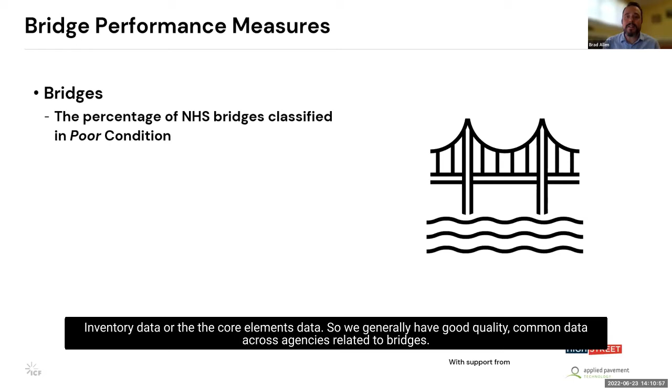So with bridges, there are lots of state performance measures agencies may look at. Most bridge performance measures are established based on the National Bridge Inventory data or the core elements data, so we generally have good quality, common data across agencies related to bridges.

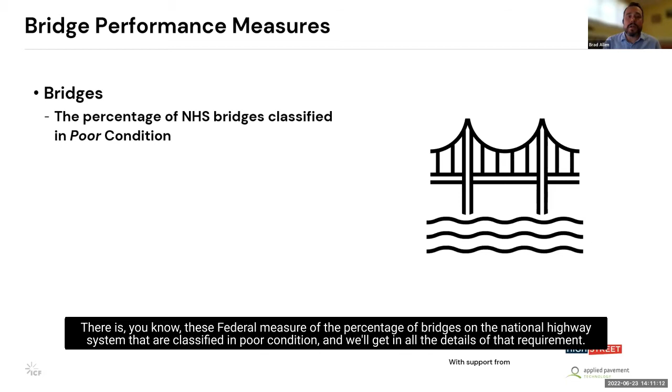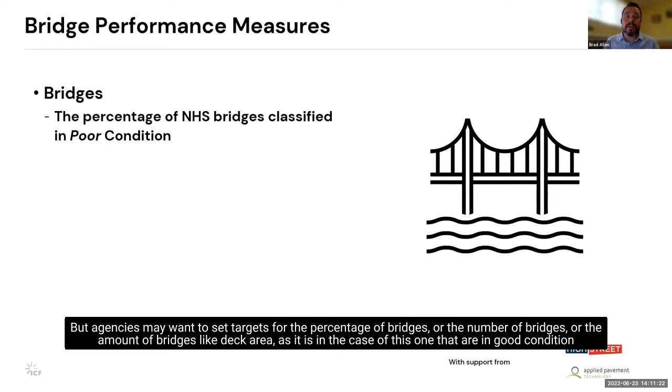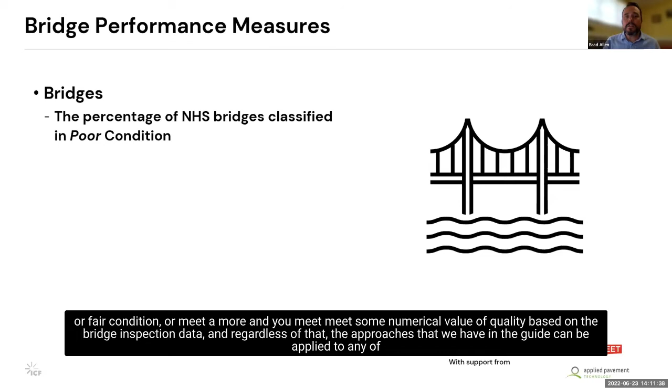There is the federal measure of the percentage of bridges on the national highway system classified in poor condition. We won't get into all the details of that requirement, but agencies may want to set targets for the percentage, number, or amount of bridges by deck area that are in good condition, fair condition, or meet some numerical value of quality based on bridge inspection data. Regardless, the approaches in the guide can be applied to any of those types of targets.

So what specifically do we present in the guide for target setting methods for bridge conditions? We have five methods presented for infrastructure conditions, along with specific details related to application to bridge performance targets as well as pavements. A little plug for next week's webinar, which will be on pavement target setting, one week from today. The way they're arranged on screen is from the more technically simplistic approach to a technically robust approach.

And it's not to say that any one of these approaches is better or could be more effective for your agency. It's just a nice way to organize and describe them, from a fairly simple approach to a more complicated approach.

So targeted change is that policy-based approach we talked about, where you simply look at your current conditions, maybe your historic conditions, and establish where we want to be at a given point in the future. Or in the case of the federal measure on percent poor, it might be a floor—you just say as an agency, we will do what we need to do to make sure we don't drop below a given condition.

Numerically, above a percent poor bridges, a time-based trend takes it further to look at how our bridges have been performing in the past. Can we establish a performance curve from that and extrapolate it into the future? We're using historic performance as a predictor for the future, and then using that prediction to inform our target setting process.

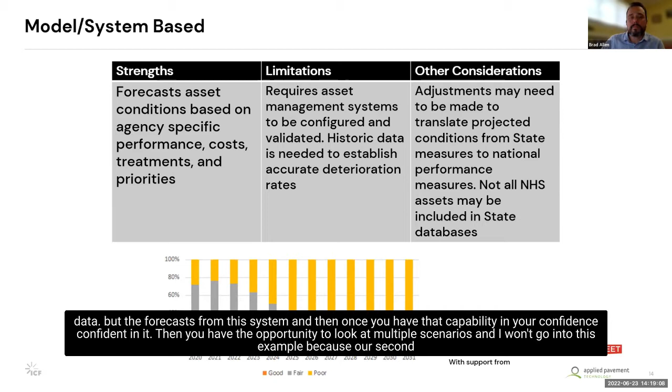Once you have that capability and you're confident in it, you have the opportunity to look at multiple scenarios. I won't go into this example because our second speaker today will be getting into this exact example from Connecticut DOT. But the opportunity to look at different funding scenarios or different strategic scenarios and understand what that might mean for your future performance, considering all of that in your target setting process.

With each of these methods I've gone through, there are some common challenges across all of them, particularly related to bridge target setting. Some of these pertain to the national measures themselves, the data behind the national measures, and others are due to the way bridges deteriorate and the way we manage and address that deterioration.

One of the issues—and I'm sure our speakers will get into it as well—is that the federal targets are on a 2 to 4 year time frame. We recognize this can be a challenge for a couple of reasons. First, bridges deteriorate slowly, so 4 years is maybe 5% of a new bridge's expected service life. Across your population of bridges, there just isn't necessarily that much natural change in condition in a 4 year time span, which leads to a challenge in setting those types of near-term targets.

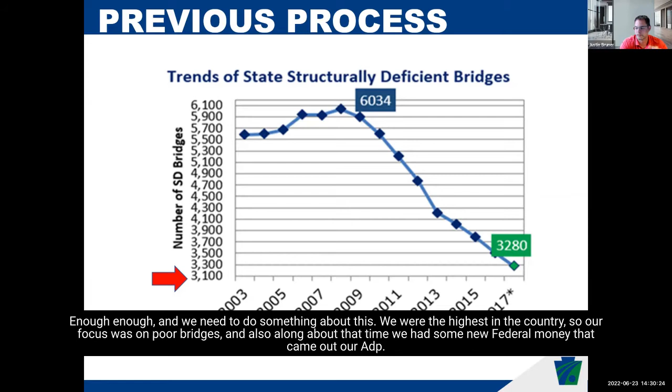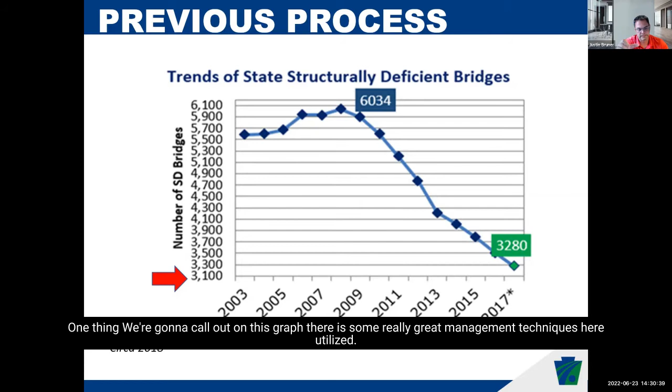One thing I want to call out on this graph, there's some really great management techniques utilized here. We call this the USA Today friendly version. If you cut your y-axis off a little bit, it does make you look like you've achieved slightly more than you have, even though you haven't. This is the version that comes out of our shop, and this is from a later time, but it's completely allowable to take off that y-axis and it looks like you've come down a whole lot further. Just food for thought.

So this is actually a really great methodology to utilize if you have excess money, or there's money set aside for these types of goals. But it's probably not the best type of performance target to utilize when you don't have enough cash, because really then people start to try to figure out how to, for lack of better terms, game the system so that you can try to meet these while still meeting other goals and targets that they're held to.

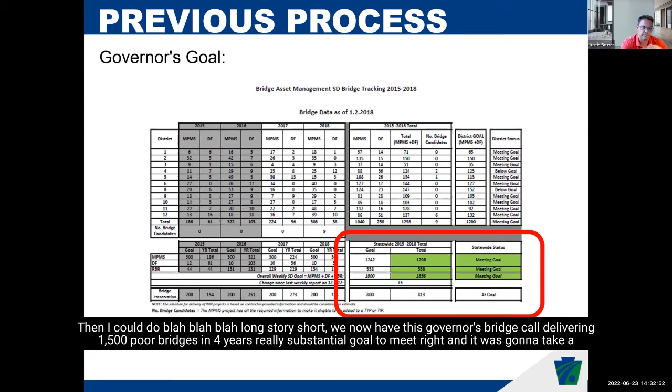And really what happened next was that in 2015, we came up with this concept of the governor's goal. The administration worked with the governor's office to come up with something good PennDOT could do. Long story short, we now have this governor's bridge goal of delivering 1,500 poor bridges in 4 years. That's a really substantial goal to meet, and it was going to take a lot of effort on our behalf. There was a lot of internal collaboration and effort to really make this happen, because it was really a stretch for us to achieve this.

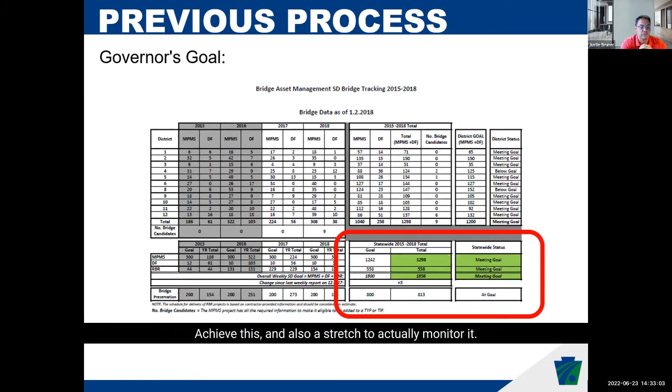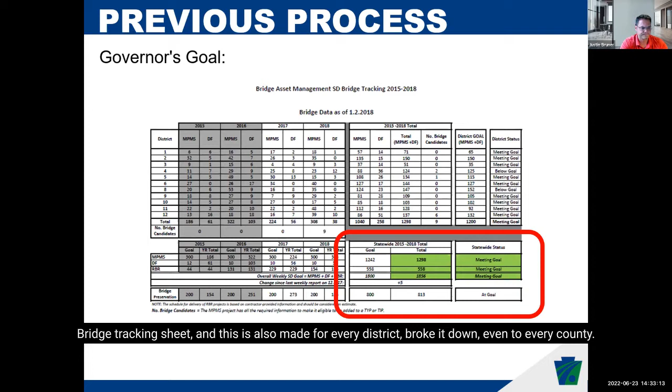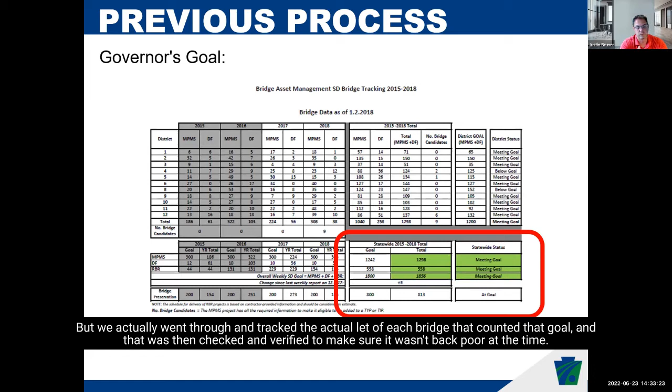It was also a stretch to actually monitor it. So we came up with this bridge asset management SD bridge tracking sheet, and this was also made for every district—actually, I think we broke it down even to every county. But we actually went through and tracked the actual let of each bridge that counted toward that goal. And it was then checked and verified to make sure it was in fact poor at the time and counted toward the goals, all that kind of good stuff. Lots of manual effort there.

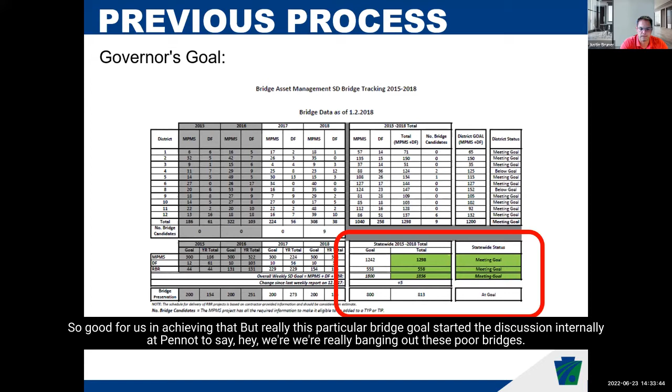As a DOT, we were a bit of an overachiever. We did achieve more than we wanted to—we achieved over 1,800. So good for us in achieving that. But really, this particular bridge goal started the discussion internally at PennDOT to say, hey, we're really banging out these poor bridges, but is really focusing just solely on poor the way to really manage our stuff?

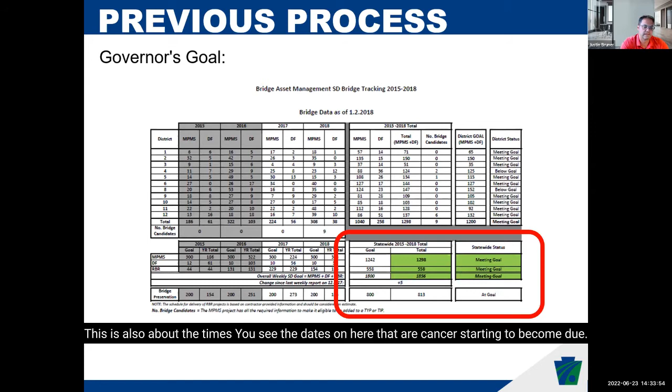This is also about the time you see the dates on here that our TAMPs are starting to become due, so there's more of an asset management talk, discussion, thought, focus, if you will. Up until that point in time, we constantly communicated with these sort of quarterly updates of graphs of where we were, historic trends, that sort of thing, tracking what we did. But we also had online performance measures that were utilized in actual people's EPRs. You really didn't want to be red, so people still had to focus on that poor delivery even after we met that governor's performance goal.

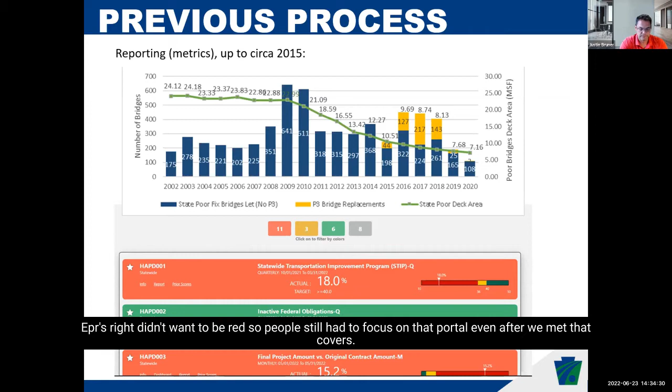So what had happened is that in the end, we did deliver a substantial amount of bridges. We got down to below 2,500, which is really an impressive feat for us overall. But the question is, at what cost? So we failed to provide the level of preservation we probably should have at that point in time, but that's okay—this still needed to be addressed. We were really behind in our number of poor.

So this sort of all spurred the discussion for us to move to our current process. And of course, current process is based off of MAP 21 guidelines, right? So you can't have less than 10%, or you should have less than 10% poor in the NHS. There's minimum conditions for interstate only bridges. We did establish those targets, and no more than 5% of bridge data should be unreported or missing.

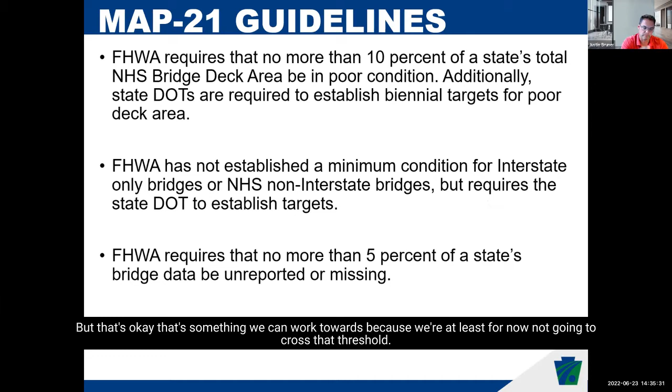Totally agree with all that. I don't necessarily agree with less than 10% on the NHS, but that's okay—that's something we can work towards because we're, at least for now, not going to cross that threshold.

What we strongly agree with is that these goals are in the context of lowest life cycle cost. That's something most of my colleagues and I believe in, because if you're in a financially constrained environment and need more cash, the best thing to do is be more efficient with your cash currently to get more down the road. It's a great first step to showing you can invest properly and hopefully get more investment from the Fed later.

At any rate, our current communication strategy has changed substantially. We've completely gone away from talking about just the number of poor. Now we talk historically about where we've been, in good, fair, and poor categories. That's important because it gives you context.

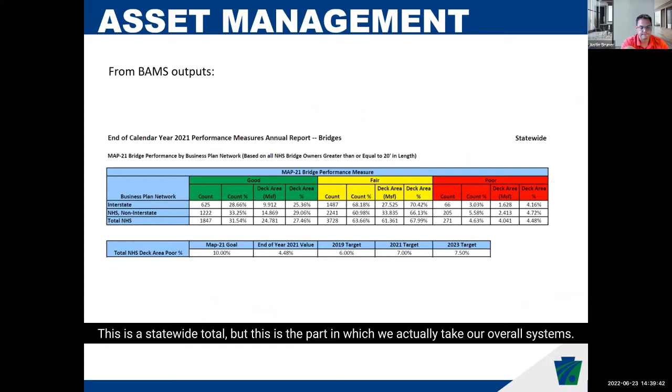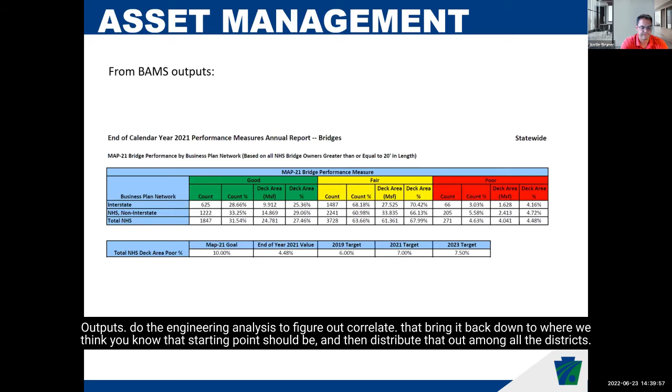So we're about 1.5% off, which is how we're starting with that adjustment. Note that in my previous targets, I had targets that were increasing. I still expect to produce increasing targets because the slope of that line is still going to go up. It's just a matter of, are we really starting at 4.5? We're going to start at 5. Is that going to go to 6? That's how we have to figure that part out based on our outputs and some engineering judgment.

This is a screenshot of that massive spreadsheet that we use to actually determine where we think those particular good, fair, poor percentages should go throughout the state. So when you start to create these programs, you have to think, okay, we've created this goal. How does that goal get distributed out to all the different MPOs, RPOs, districts, right? So that's, again, where that engineering analysis comes in.

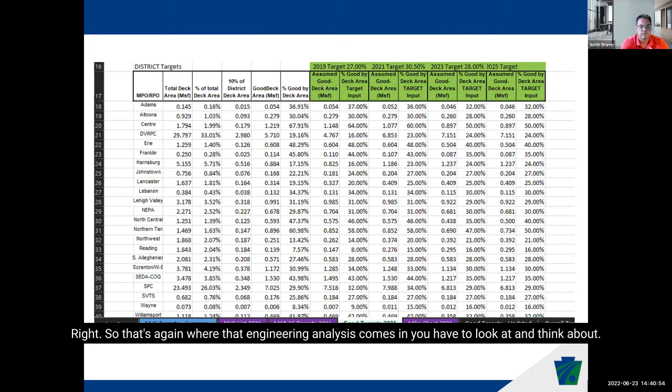You have to look at and think about budget and capacity, current condition, right? Do they have a lot of poor bridges? Do they not have a lot of poor bridges? Can they afford to reduce more, or do they not have money to give to meet these overall goals? Again, it's a very manual effort for us, and I feel as if there's a lot that can be done to improve that process.

So just in summary, we are less than 10% poor, so we're not in danger of any sort of issues currently, but I see that happening in the future. We do also set targets for fair and good, so that's really good. And again, there are those inherent issues with this process, right? That equity among the districts and how you distribute it. There's a lot of information analysis that goes into that. It's actually quite difficult.

So with that in mind, let's talk about where I think we should go into the future. Right now, in our overall planning process, we have BAMs and PAMs, okay? And we have a couple other systems in place. What we've started to work on is what we call Project Builder. That's a system that sits on top of both of our BAMs and our PAM systems, and it consumes their outputs, stitches them together, and makes draft projects.

That's kind of important to note because all systems create recommended treatments. It's really hard to forecast your overall future conditions based just on treatments. You need to do projects. So why is that important?

Well, let's face it. Let's say that a bridge is recommended for replacement in, say, 4 years from now. But that pavement section that it resides in is going to get let next year. It's possible that replacement may actually qualify for rehab versus a replacement, or vice versa. If you're going to work in a section many years later, that preservation activity may have delayed to a rehab activity. So it's really difficult to project exactly what happens out in the future when you start to combine these things into projects, because that's how DOTs turn cash into assets, right? Projects.

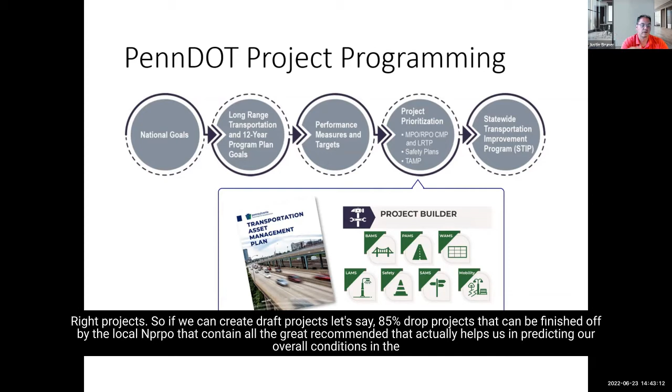So if we can create draft projects, let's say 85% draft projects that can be finished off by the local MPO, RPO that contain all the great recommended outputs, that actually helps us in predicting our overall conditions in the future. It also helps us be much more efficient on how we allocate that money.

So one of the great things about this is that not only can you consume bridge and pavement information, but now you can consume other things into that as well. So safety and mobility and equity and all those other things that go into project selection. So now you can rank these things on a more uniform scale, and you can show the cost associated with achieving all of those goals, which is sort of an added benefit for us.

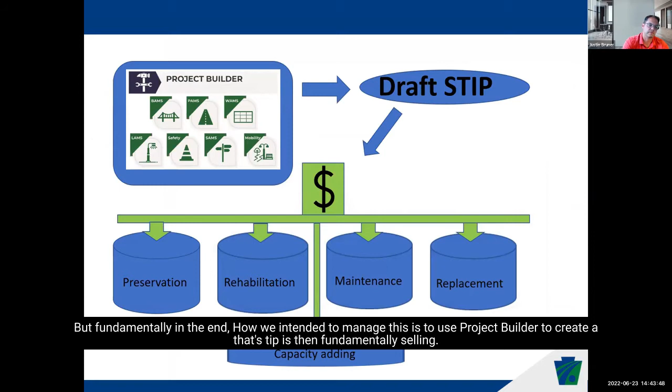But fundamentally, in the end, how we intend to manage this is to use Project Builder to create a draft STIP, okay? That STIP is then fundamentally something people can work off of, but then we can fund people's STIPs based on buckets of preservation, rehabilitation, maintenance, replacement money, right? So we say, well, it looks like this STIP that came out has 22% preservation. So if you select 22% preservation projects, you will likely be compliant with our overall process and our goals, right? They would have complete freedom to select whichever projects are in there, but fundamentally the systems would sort of provide some guide rails, if you will, on what can and can't be selected.

So we feel that's really the way to go with this. We're not there yet, but I feel as if this is close. Hopefully we'll be utilizing this next year. And with that, I think I'm done. Stop sharing here.

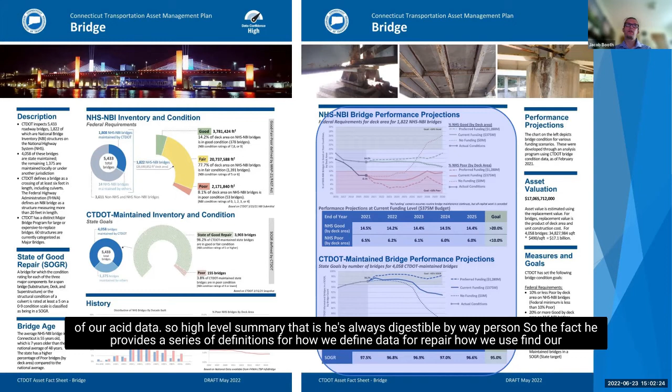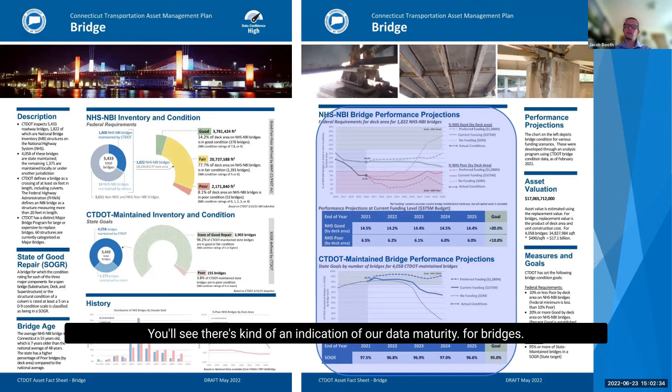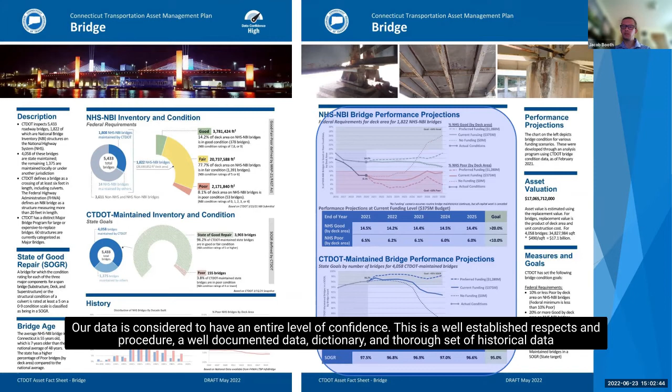The fact sheet provides a series of definitions for how we define state of good repair, how we define our inventory, as well as what our goals mean. At the top, you'll see an indication of our data maturity. For bridges, our data has a high level of confidence, with a well-established inspection procedure, a well-documented data dictionary, and a thorough set of historical data.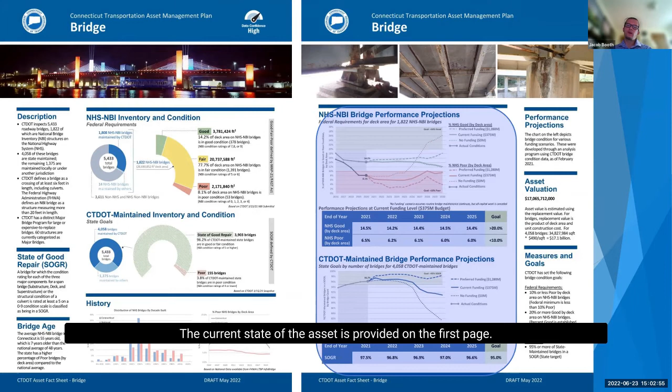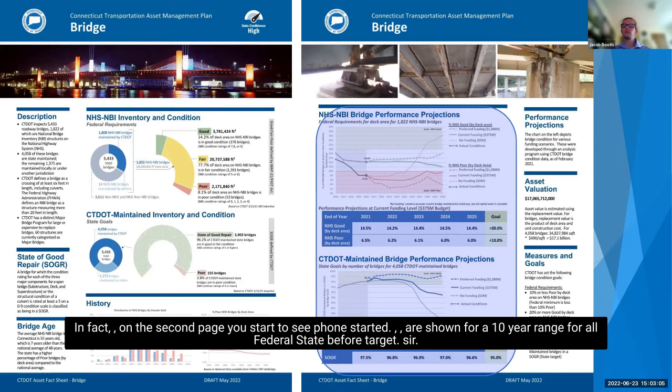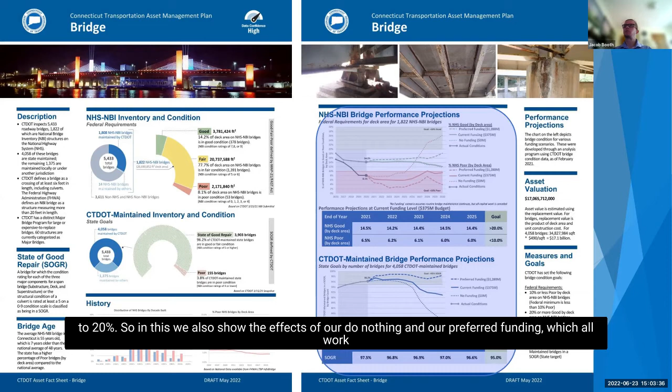The current state of the asset is provided on the first page of the fact sheet, including condition data. On the second page, you start to see the performance targets prepared by the department, shown for a 10-year range for all federal and state performance measures. Targets are also shown annually with a more exacting measure at the bottom of each graph. The long-term goal is presented on the right, and you'll see this still says 20%. We're revising this down because no amount of money we throw at the situation will ever get us to 20% good. We also show the effects of our do-nothing and our preferred funding levels to accomplish all work.

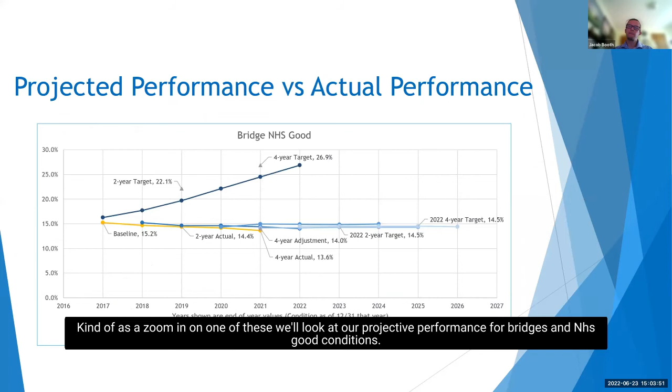So zooming in on one of these, we'll look at our projected performance for bridges in NHS good condition. We've been tracking the actual performance since we started performing the TAMP, as well as where our 2-year and 4-year targets have landed and the 5-year short projections at every point. Starting with the yellow line, that's our actual asset performance for the past 5 years now.

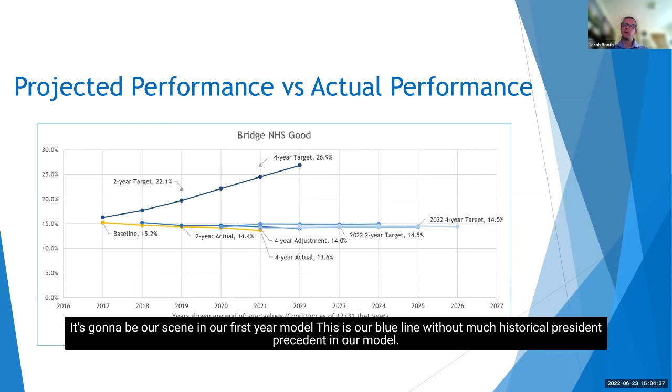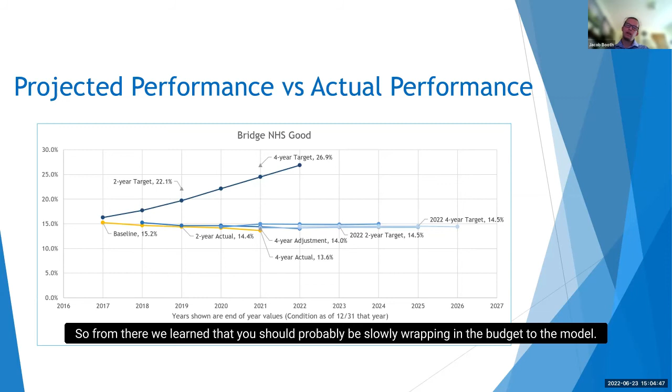Having this historical information laid out as a precursor to our projections helps us identify any swings that are unrealistic. This can be seen in our first year model, this dark blue line. Without much historical precedence in our modeling, our targets greatly overestimated our actual performance. So from there, we learned that we should probably be slowly ramping the budget into the model, refining our cost data to make sure it's actually capturing all the externalities of a bridge project, and refining how our inflation and discount rates are included in the model.

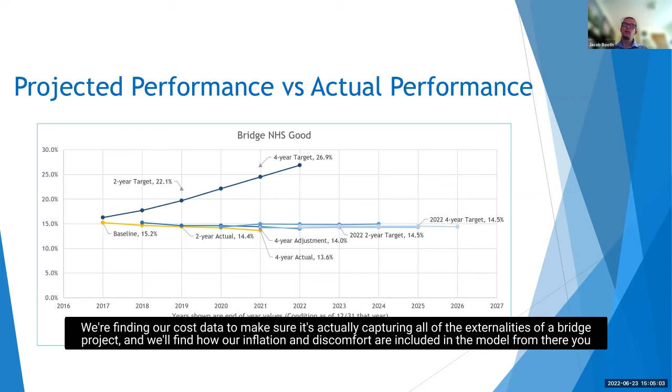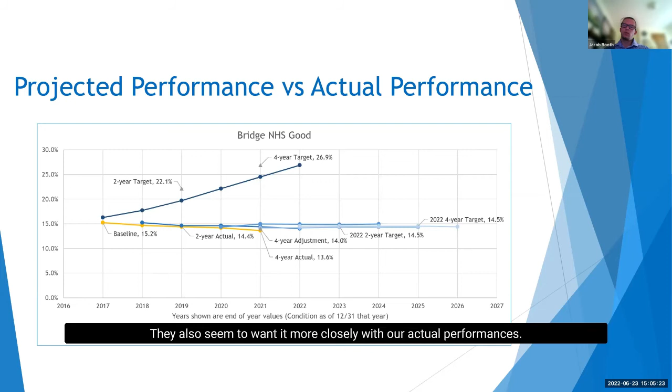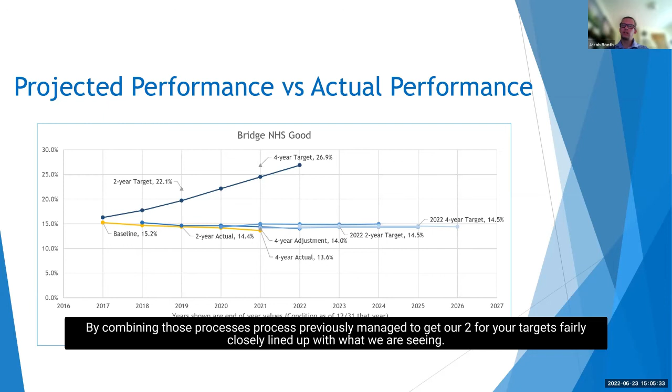From there, we saw results that much more closely lined up with our real performance. You can see as these blue lines get lighter, they also line up more closely with our actual performances. By combining those processes, we've managed to get our 2 and 4 year targets fairly closely lined up with what we're seeing in reality. And we're more and more confident that we'll be able to achieve these 2 and 4 year projection targets.

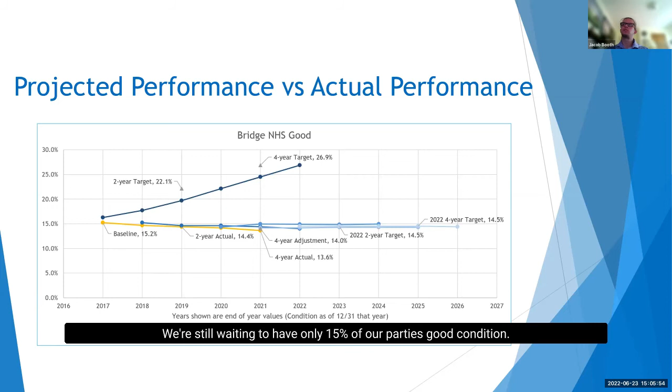I'll stress again, these are our performance targets - they're outside of our performance goals. We're still aiming to have over 15% of our bridges in good condition, less than 10% poor, and 95% in state of good repair.

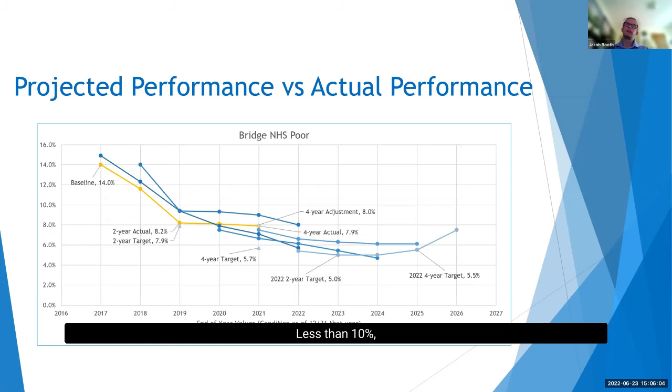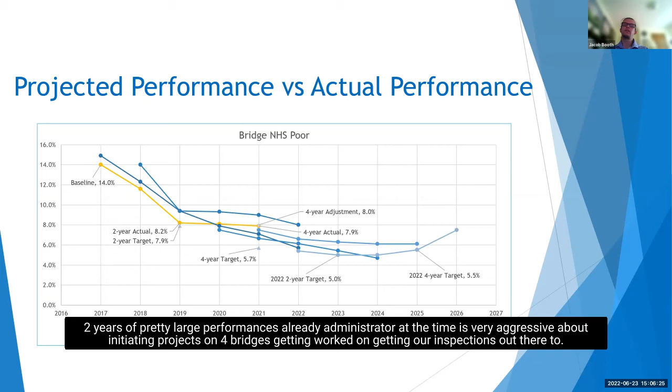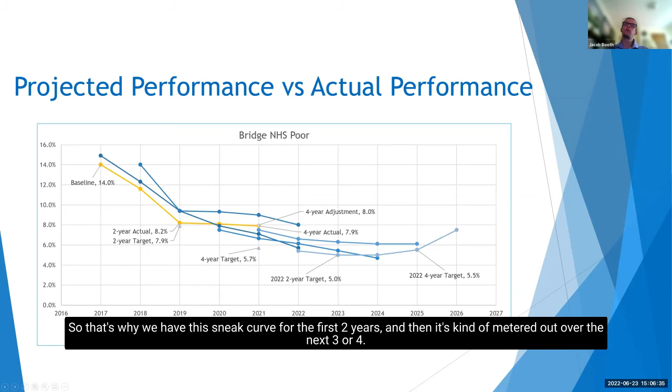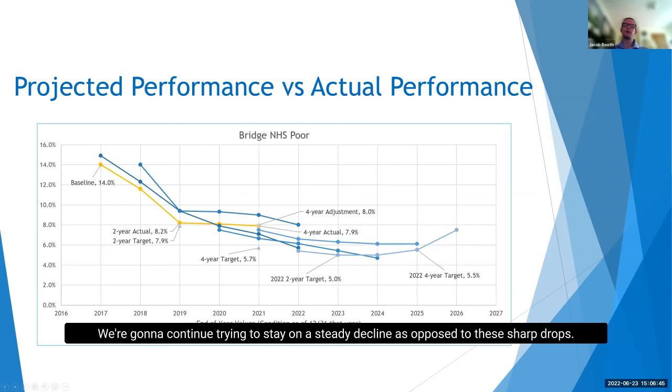A similar graph shows what's going on with NHS poor bridges. We had 2 years of pretty large performance increases - our bridge administrator at the time was very aggressive about initiating projects on poor bridges, getting the work done, and getting our inspection crews out there to decrease the conditions. That's why we have this steep curve for the first 2 years, and then it's metered out over the next 3 or 4. We don't anticipate getting such a steep curve again; we're going to continue trying to stay on a steady decline as opposed to these sharp drops. It's a lot of work and a lot of additional cost to run things that way.

Finally, our state of good repair line is steadily working its way upwards. We're projecting in the out years to start pulling down again. As Justin alluded to, when you chop off large portions of your y-axis, small changes look very drastic - this chart goes from 94 to 98.5, so any individual jump accounts for a lot of change.

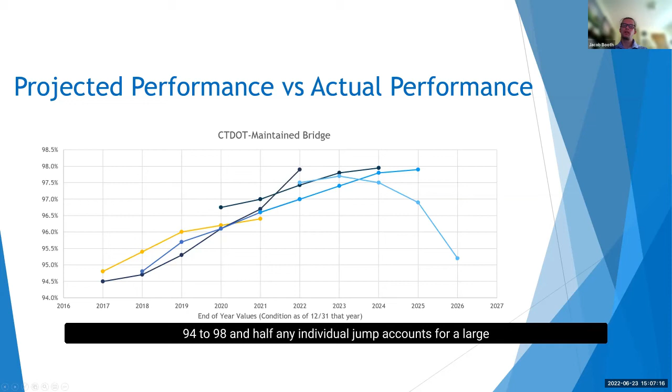So now that we've gone through and documented everything we wanted, all of our projections and targets over the last couple months, we start bringing this to our stakeholders. Our planning division holds routine monthly meetings with metropolitan planning organizations. After finalizing our targets with management, we present our current conditions, 2-year targets, and 4-year targets to the MPOs.

MPOs have the option of signing on and using our DOT targets or preparing their own targets. So we present our process, our methodology, and our results, and we seek concurrence from them that they would like to sign off on the state targets or if they would like to go their own way. To date, no MPO has decided to set their own performance targets.

So with our final concurrence from the combined executive team, our MPOs, and then we get some final buy-in from FHWA, the performance targets are published in the TAMP and serve to guide and inform people over the next several years.

A brief presentation there. Any questions? I'd love to address them now.

All right, thanks Jacob. That was great, and I know the process that you just summarized for us has been cited in, and we use it, we reference it in the draft guide. I think it's been cited in more research about target setting than probably any other approach, and it's very well documented in the 2019 Connecticut Transportation Asset Management Plan as well. So another source for folks.